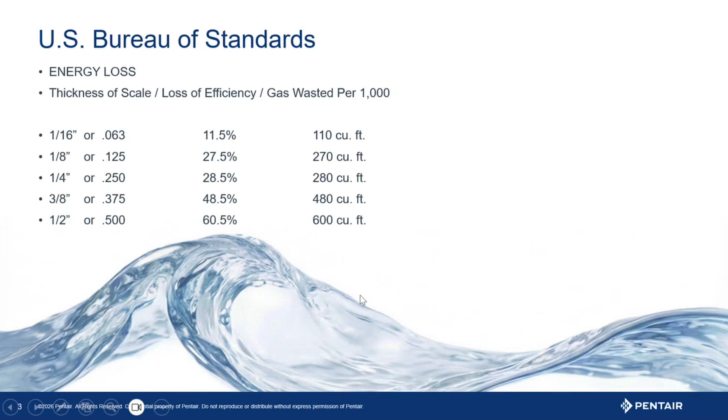Our existing Autotrol platforms - the 255, 263, 268, 269 valves - we have 4 valves that used up to 5 different controllers. That's a lot of different variation in the marketplace for technicians to recognize and deal with quickly. So their first challenge is recognizing which platform, which valve, and which control is combined here in order to get the right product to work on.

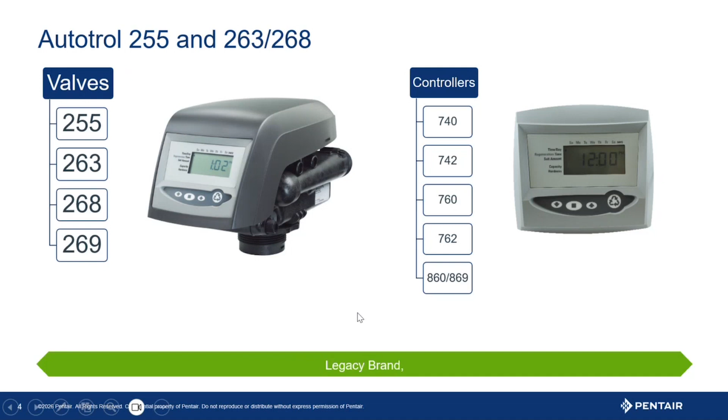This is the legacy brand. This is an evolution of this product over time as it developed. But it's really time to update and coalesce a lot of those controls and that product into a more unified product that's easier to manage from a business perspective.

We're improving the interface. You have a 4-button control with real buttons, so we can eliminate the capacitive touchscreen, which can drive technicians nuts with lubrication on their fingers, gloves, or even being just dehydrated at the end of the day where it won't pick somebody up.

Much easier programming - just a bit different than what you're used to, but it follows a very similar architecture and labeling of the Logix controller, while being easier to navigate. We have a quick start and field update application. The first time this control is powered up, it's going to prompt you to go through a quick start guide. That can benefit OEMs and assemblers for quick startup and programming in their facilities, or if you're upgrading controls, you can have your techs go through it quickly. It's all prompted for them - they don't even have to enter the menus, it just pops up right on the screen.

Baseline plus advanced software - this is doing a lot of the math behind the scenes. Unlike our Fleck controls, Autotrol controls, the EiQ, will do some of the math for your technicians behind the scenes so they don't have to self-adjust programming to match an install base.

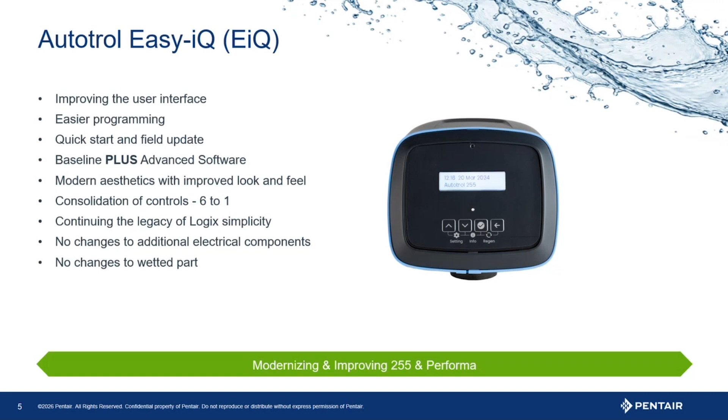All the wetted parts are the same. All the optical sensors are the same. And all the motors are the same. So all those components from the control back are identical to what you're used to working on already.

Now we've assembled into this control an intuitive interface, very easy to read graphic text and display. It's multi-language. You can customize it with your business's information if you wish, with name and contact information. You have a colored backlight that will indicate state. We'll go through that here in a minute.

And just an updated feel to the older look, so you can refresh that look in the basement so it doesn't feel dated. Some customers have a cosmetic appeal need that happens even with a functional piece of equipment like this.

As new additional features, we've added a USB-C port for easy software upgrades if and when they're needed, and programming upload, so you can have lower capable technicians program without introducing human error into that programming, as long as it's programmed correctly in the spreadsheet. So it helps you be more successful programming with your techs out in the field.

We have holiday mode, which allows you to set the unit to basically go into a regen and stop at the end of brine draw. What that does is fill your tank with heavily salted water, which inhibits bacterial growth. And on the program date, when you come back, it will just regenerate and finish that process, and you're good to go. Great application for any short-term rental property owners you might know in your business, or dealers that service them.

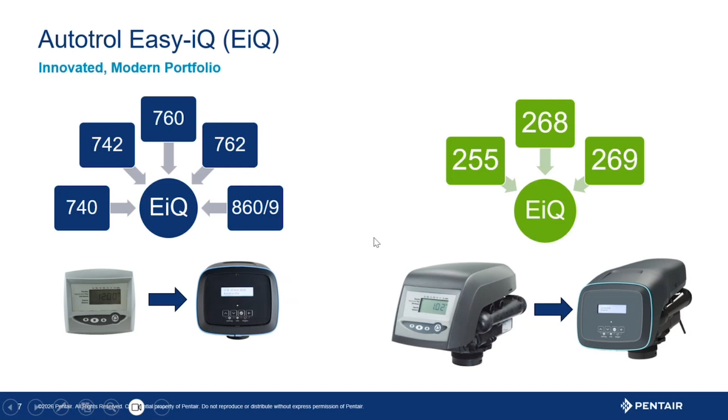Now, this is the same performance values on the valve itself. Proforma, it's still a 25 GPM service, peak flow service application, so up to 5 cubic feet of resin. In that regard, you have up to a 20 GPM backwash, which makes this great for lifting heavier medias in a residential valve package.

It has a little more capability than a lot of our competitors do in this regard, and even some of our own products. And it allows us to lift calcite, KDF, any of those heavy medias in special applications where you might need the heavy backwash.

They're 2.5-inch tank openings. And remember, these are hydrostatic to 300 PSI. This is a hydraulically balanced valve. So make sure you understand the context in which you're putting your valve in.

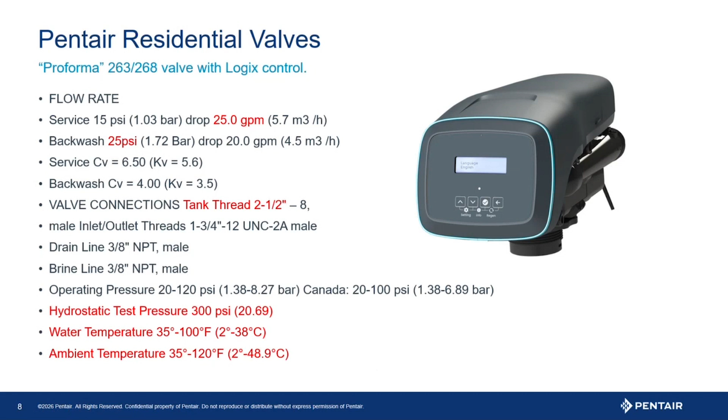Up to 100 degrees F it can handle. Let's not walk that edge. So be cognizant of proximity to water heaters, and up to 120 degrees F external temperature. So if you're installing these outdoors, make sure you provide them some shade so they don't get cooked out there.

All right, so going into programming, this is going to be a real introductory look. So I'm not going to go through it all. Too long of a class for that, for the time frame.

Visual indicators: if it is white, it's in service. If it's green, it's in regeneration. If it's yellow, it's a minor error - this is like an aborted regen or a run-on error, something that says we just kind of goofed up a little bit, but we don't have any major failures in the components of the unit. Red is going to be something along the lines of a motor failure, optical sensor failure, or meter failure, where they're not detecting anything at all. This is call now, get me fixed now, sort of an error code.

And you'll get all of this information displayed on the screen, and the flow indicator is going to show flow pulses within the last 5 seconds. So it's going to update every 5 seconds for the new peak flow.

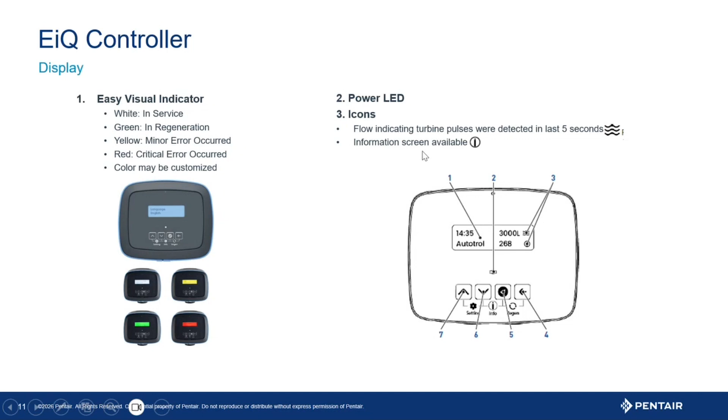Now, the controls, the buttons - we've kept this really simple for technicians. You push 2 buttons to access any information stored in the valve. 2 on the left are settings, 2 in the middle are diagnostic and information, and 2 on the right are manual regen.

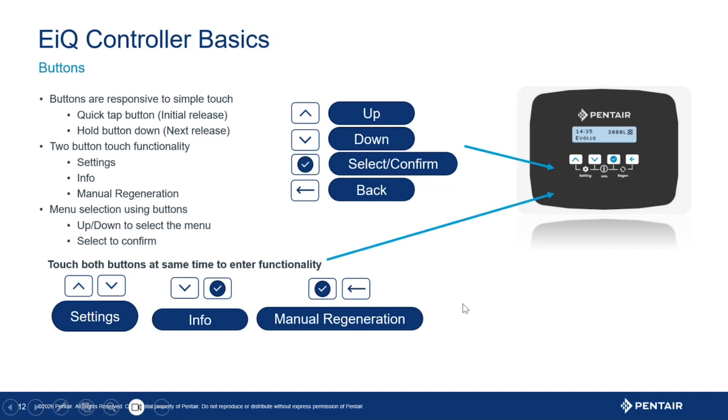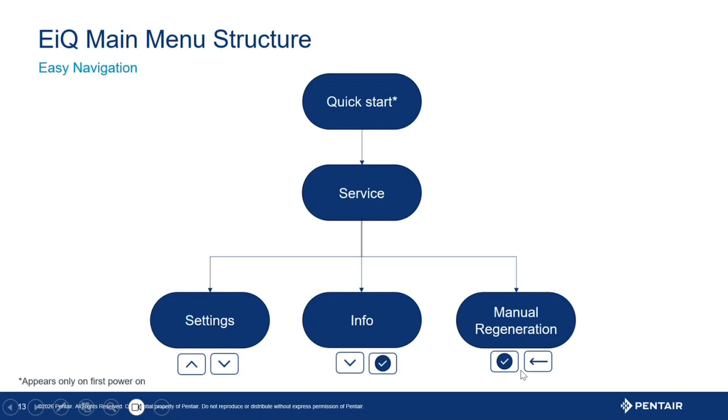So when you first power these up, you're going to get a quick start guide, and then it's going to go right into service. If you wish to get into the settings, info, or manual regen at that point after the quick start is done, you just hit this button combination to get to that information.

So what does that quick start menu look like? It's going to give you your language, which valve you have, unit of measure - both US and metric, imperial units, hardness in milligrams per liter or grains per gallon, and French and German hardness for international markets, or aquaculture, which uses both measurements interchangeably. Hardness is in milligrams per liter from 0 to 199, so it's capable of handling almost any water environment out there.

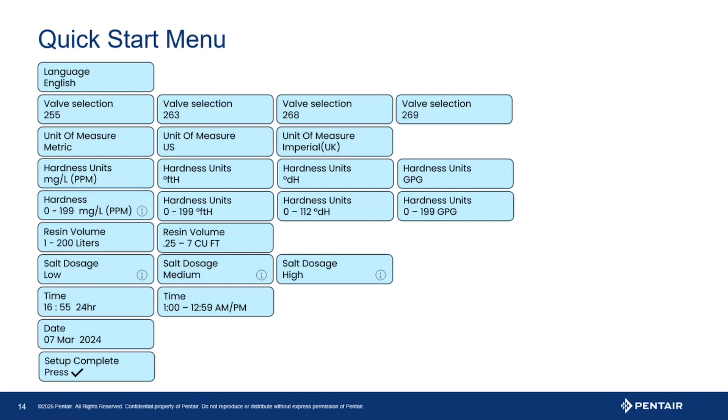You can do resin volume in liters or cubic feet, which is very different than other controls on the market. You can start with the standard low, medium, and high salt dosages you're familiar with on the Autotrol line, 24-hour or 12-hour clock, date, and then just hit the check mark to start up the unit - it's done programming, all prompted to you. So if everything else at the OEM level is correct with cycle times, this is a very quick startup process, even for a novice tech looking off a worksheet.

Now, once you're in the service screen, it's going to alternate between four things up on top: date, volume left to regen, your flow rate at that moment in time, and text - which can be name, number, email, whatever you want to put there.

If you need to get into settings, it's going to give you all of these options under settings: user, cycle times, installer settings, OEM settings, passwords for each one of those levels, and diagnostic settings. And then you can reset the settings.

And then if you use the salt alert, this is based on number of regens versus the number of pounds you put in the brine tank, so you need to understand that relationship. What are you brining at versus how much salt you have in your brine tank - divide that by the pounds of salt you brine at, and you get the number of regens, and you can program that in. I suggest 2 to 3 regens light on that, so you give people a chance to go out and get the salt and add it when that pushes off.

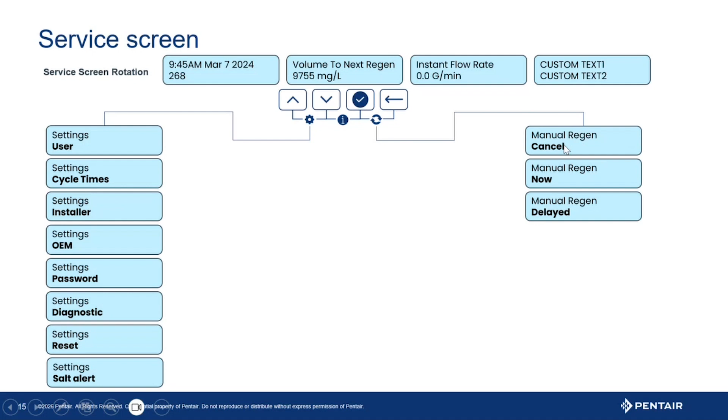When you hit manual regen on these two buttons, the arrow and the check, you can select cancel now or delayed to a set time. Holiday mode - this is wonderful for those folks with multiple homes or Airbnbs. It allows you to store the tank between visits and dates with a heavy brine load, helping mitigate bacterial growth in the tank. There are some saltwater bacteria, but you have to be in the tropics or very coastal to experience that impact.

For the vast majority of the world, this resolves a lot of growth issues from the water supply. Continuous flow alert - this is for detecting leaks in homes with slabs, or where all the plumbing is in the walls and you won't be able to witness leaks. This will help you detect it - set it by gallons over a certain period of time to trigger the alert. This is really a CYA sort of function.

Pick the language, and you can enter in the hardness - this is the user settings. This is the stuff we're going to allow the end user in the home to have access to and change. So you can tell them to change hardness if they need to, and they can change language if they need to.

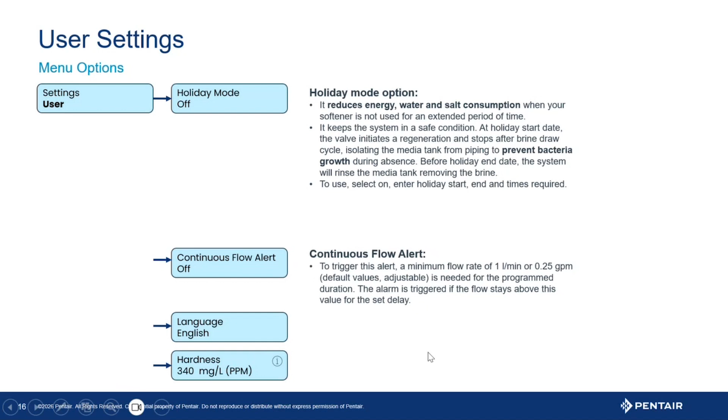Cycle times - this is going to be under the installer guidelines, so you're going to enter your passcode. You're going to select standard or high efficiency, and high efficiency is only available on the 268, and then you'll get access to your times.

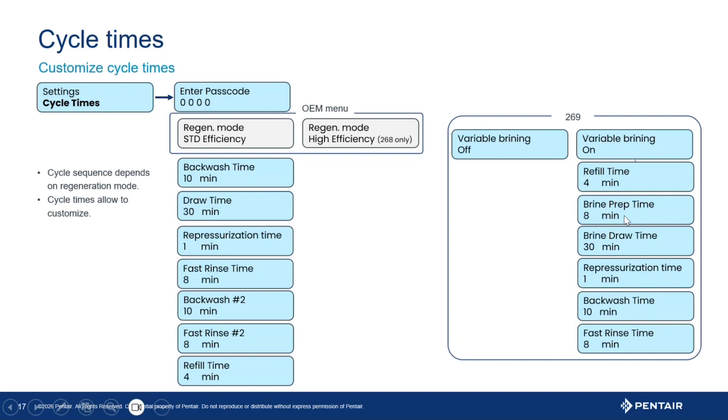Note on Autotrol: never reduce the repressurization time to 0 - minimum of a minute there. And if you do have the 269, you can turn on variable brining and the steps, and it will be brine fill first. Remember, this is a stock program - it does take a couple hours to get a fully saturated solution at standard tap water temperatures. Now, if this is an outdoor install, that's going to speed up that greatly in the summer versus the winter. Temperature matters here.

Installer settings has a passcode that you can program, so your installer can lock the customer out of these settings and keep them from getting into this.

Happy fingers always are a problem, but this gives you unit of measure, hardness, maintenance schedule if you're timing it with RO service, salt dosage, resin in cubic feet, and your regen type.

This is where, if you're used to using time clocks, day of the week regens, you just select the days of the week you want, and you're done. Easy peasy. If you want to go to time clock with override, you punch your override schedule there.

And if you want metered, regen type metered delayed, you can go into that, or set it to immediate, and this is where you'll get your reserve type if you're going with the metered version. It can be a fixed percentage, weekly reserve, or variable reserve with the Autotrol products.

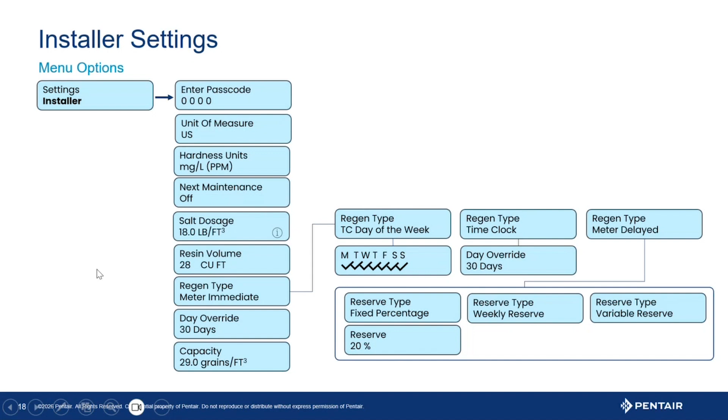Okay, your OEM settings. This is for the distributors and the people assembling their own units in their factories or in their buildings, so you can lock people out of changing this data in the field or your installers from doing so. You'll be able to lock in the valve, what efficiency standard, and what text is on that item. And importantly, they can't change the meter type or injector type once the unit is assembled. So you can lock your installer out from changing things you don't wish them to.

This can also remain left open as well, that's open architecture there. If you do need to reset your passwords, there is a new password option here. You can set the code and enter your new password, and you can protect the cycle times, the settings for the installer, and the OEM each individually, so you can allow access at different levels of the supply chain to make sure we're not getting nuisance reprogrammings by folks.

And if you need to reset things, go to settings and reset. That'll allow you to enter the code there, and you can reset the parameters in the valve.

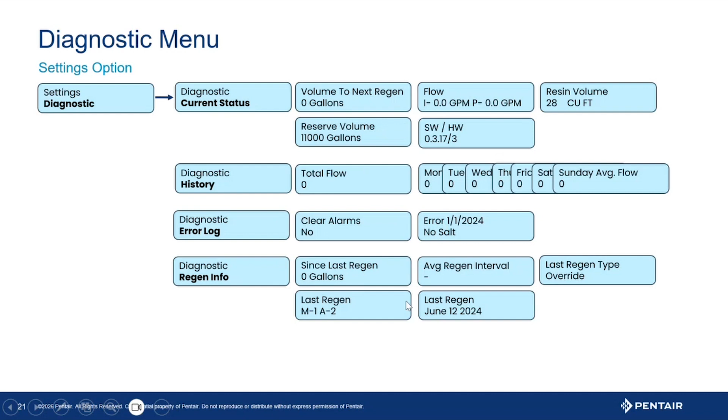And we're going to be charting data for a full week with this product. So if you get into diagnostics, it'll give you current status, gallons to next regen, flow rate, cubic volume of resin, reserve volume in gallons left on the unit, software and hardware version in case you need to update, your historical data, your regen information, your last error, whether it's no salt. All that good information that's in the head will be there for you to peruse and even download and take back to the office.

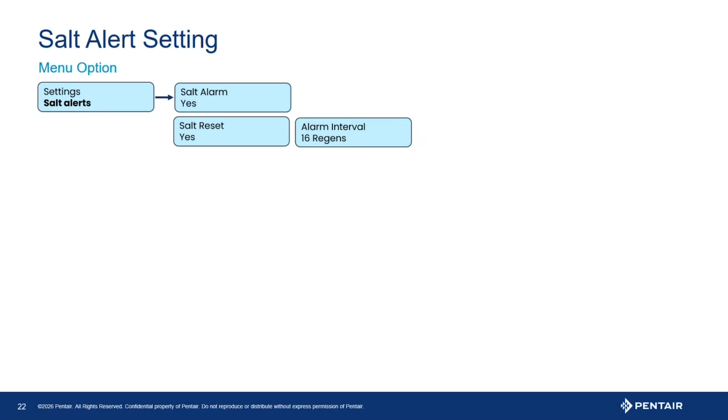Salt alerts, this is all based on the number of regens versus pound of salt in the brine tank. This is a calculation, not direct sensing.

Now, the USB functionality, this is wonderful. Having run my own service business, I always was a little worried about sending guys out that may not have been as up to speed as they need to, but that's the reality of service work and new employees, that type of thing with turnover.

This helps you eliminate some chaos. I can download a program, put it on a thumb drive from the Pentair Partner Center, download the spreadsheet, create a program for a specific customer or series of products I am producing. I can hand a thumb drive to a technician. He can plug it in, follow the prompts, and get a new program installed.

To make it a little bit easier to get in, you can pick up one of these dongles or adapters at a store like Walmart for under 20 bucks. It's a very useful tool, especially if you got guys with big hands that may have a hard time getting a stick in their hand in behind the cover.

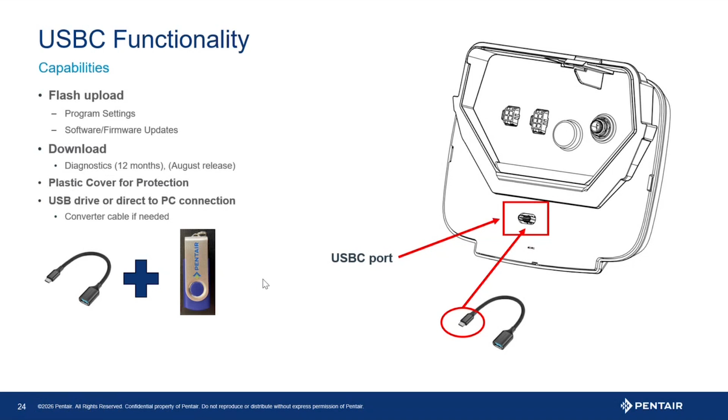Please leave it powered up when you do it because it's drawing power off the board. And you can download 12 months of data. That is fantastic if you're trying to see use and abuse issues with a product versus mechanical failure. It allows us to discern what's really going on.

If you want to upload details from the structure of the diagnostics, you're just going to go to settings and download diagnostics. Same thing with the software versions. Go to the Partner Center, download software versions, and update them the same way. It'll go through the prompts, and that's a bin file. You'll be able to see it there.

Now, the retrofit, easy peasy, all day long. Probably the easiest one we've ever done. It's literally cover and control swap with the old unit. Remove the cover, remove the control. Yes, you need the cover and the control to do this upgrade. No other way around it. So you can't just order controls and pop them into this thing. Doesn't work, doesn't fit.

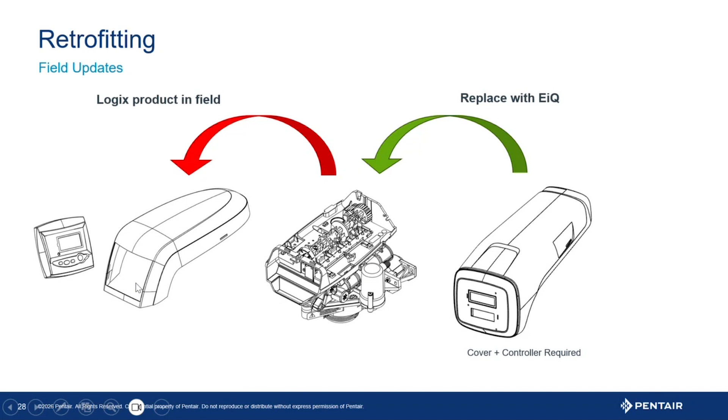The control, match plugs. Really, really simple. You could probably even do this blindfolded.